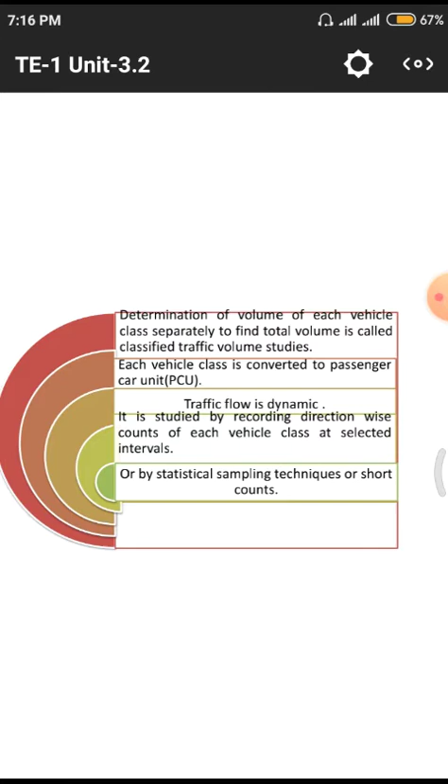These are the parameters used in traffic volume studies and their objectives. Different parameters are involved in these studies, meaning we have to control different points, such as controlling required at turnings, traffic lights, and signals.

Next, we have to give some amount of priority for different lanes through special design methods and facilities. Sometimes, for example, politicians and other politically responsible people have to move in a particular definite path, so there are no obstructions to their routes.

Likewise, we have highways of national importance, like high courts, supreme courts, and other structures with more political and social responsibility. For these places too, we have to give priority levels and control the traffic plan through different operational methods and pavement design based on the importance of the structures.

As I mentioned, high courts and other industrially important structures have more importance because a larger number of people move to those places according to their needs. So we have to give separate gradation to those ways, with a separate number of roads allotted to those particular places. This leads to the classification into manual counting methods and automatic traffic counting methods.

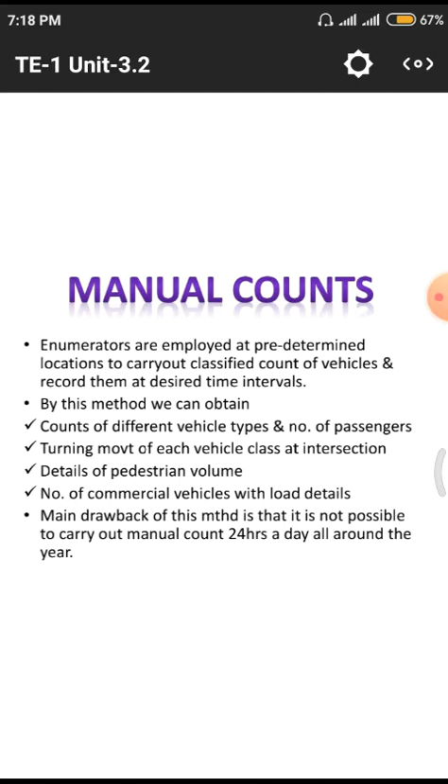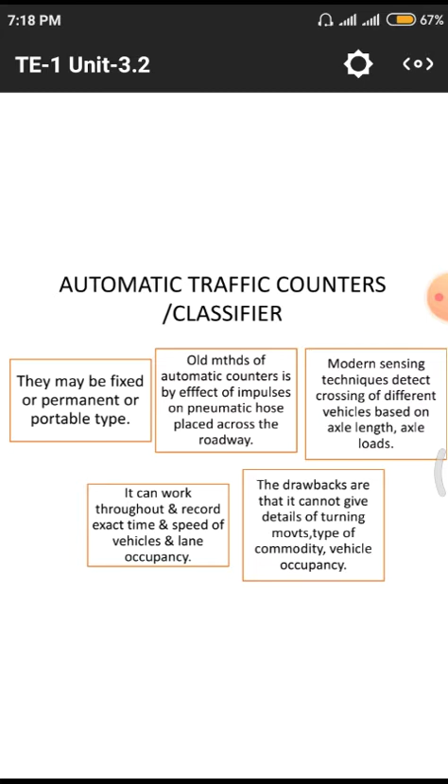Next are the automatic traffic counters - how they give data, and what is involved in these automatic traffic counters, whether it is robots, signal systems, or sensors. We have different kinds of traffic counts, each with its own purpose and output. We also need to consider if there is any interruption or any other special mechanism involved.

We also have an X cross section, where there is a huge amount of angle of deviation with respect to the road. But in the plus cross section, we only have 90 degrees and 180 degrees angles of inclination between the straight road and the crossing road, so it is called a plus road.

In that plus road, vehicles move in different directions - straight, left, or right. Every vehicle on every road has these three options, so they create conflict points where lines merge. In those areas, we have to use traffic lights and controlling systems in the form of police and other patrolling systems.

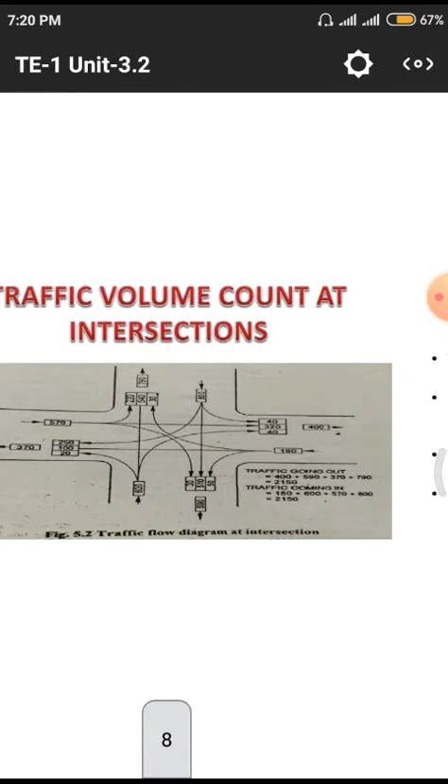Next is the presentation of traffic volume data. How do we obtain this traffic volume data on the basis of annual average daily traffic? That means we have to collect the total traffic data in a particular year, year to year, or for 5 years, depending upon the increment of the population in a city.

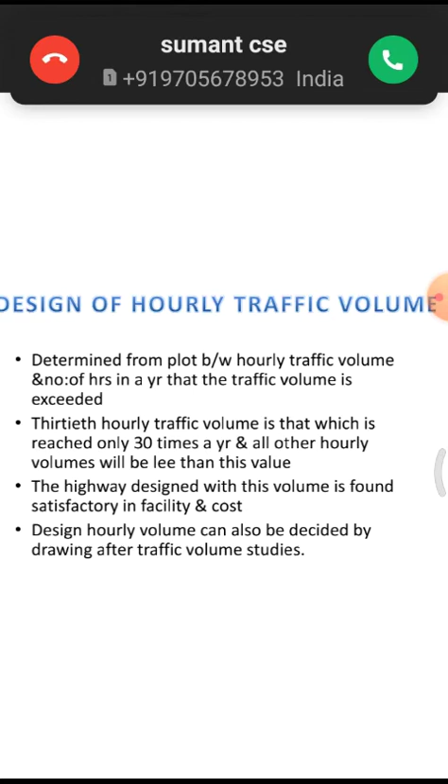So the highway is designed for whichever volume is found with a satisfactory facility and cost. That means 30th hourly traffic demands will give the maximum usage of the particular highway, so they definitely give which places we need to identify and which places we need to densify with roads.

Next one, the highway is designed for a particular volume and found to be satisfactory with respect to facility and cost. That means major content of the highways are designed for the purpose of moving carrier vehicles and other commodity vehicles, so that those highways will satisfy the needs of the vehicles traveling on them.

If there is a less span of the highway and a huge quantity of vehicles moving, automatically there may be a requirement in terms of densification or enlarging the roads, from one way to two way, or two way to multiple lanes, depending upon these hourly traffic demands in particular areas.

Next one, design hourly volume can be decided by drawing traffic volume studies. Why? Because here we are designing hourly volume, and that can be decided by using these traffic volume studies.

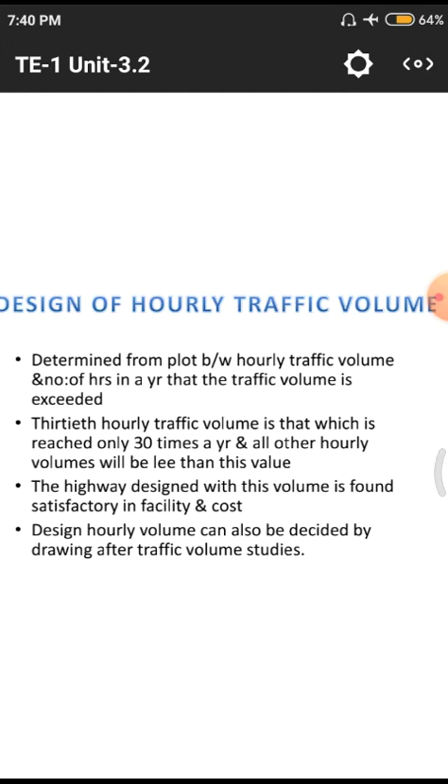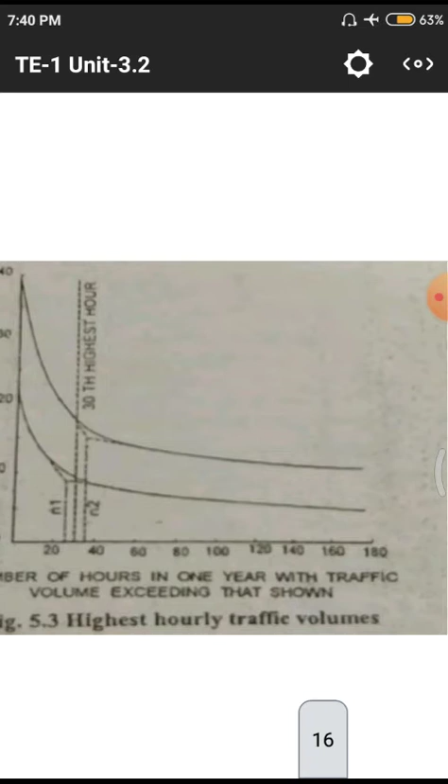This is the graphical representation. In the x-axis we are having the number of hours in a particular year shown - that means 20, 40, 60, likely up to 180. After that we are having the y-axis showing hourly traffic volume percentage - that means 0, 10, 20, 30, 40, and in those particular few periods there may be an increment.

After that we are having a decrement and a flat level. That means at the 0 level we are having 20, 40. After that we are having a decrement value - that means from 25 to 35 we are having the decrement value. So we need to take that point and enlarge the roads.

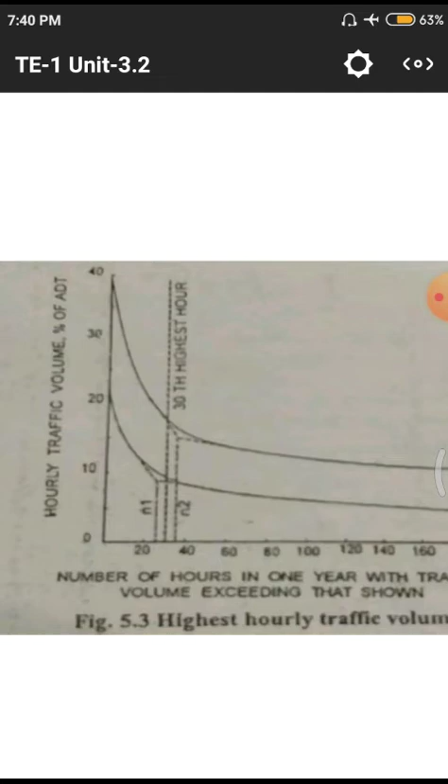How do we need to analyze this particular traffic volume data?

First, we have to use shortcuts and adjustment. That means what shortcuts we are having. If two roads are here, I will show with diagrams. If we start our journey from here and need to move, if there is any alternative, we need to simply connect these two, so that we save a huge amount of distance to the traveler. So we need these shortcuts, meaning different shortcuts to connect to different places.

First of all, we need to observe to save on traffic, commodity and vehicle clashes, and also to greenify the particular area by decreasing fossil fuel usage. Next, adjustments also come under these shortcuts.

Because of the requirement of a large number of enumerators and time and financial constraints during traffic volume count studies, shortcuts are adopted. That means depending upon the vehicular usage for a particular place, we have to find different shortcuts. The shortcuts totally depend upon the vehicular movement from point to point.

Previously I discussed drawing two points with a right angle triangle, so that the right angle triangle will give a solution. That means if we move in a diagonal pattern, automatically the total length of the journey will decrease. Likewise, we need to understand different routes and their shortcuts.

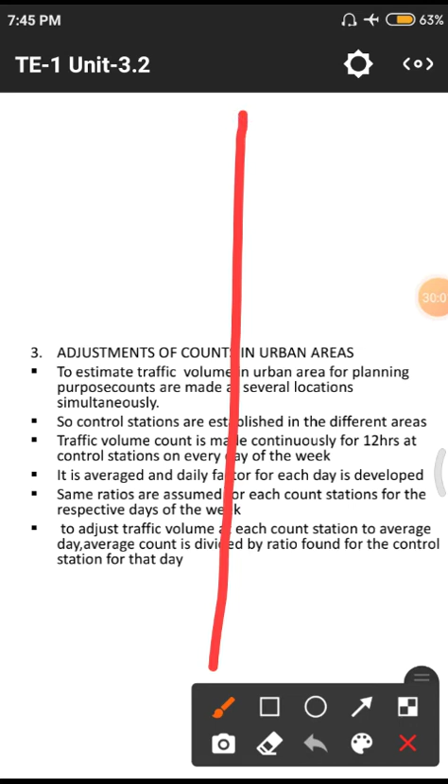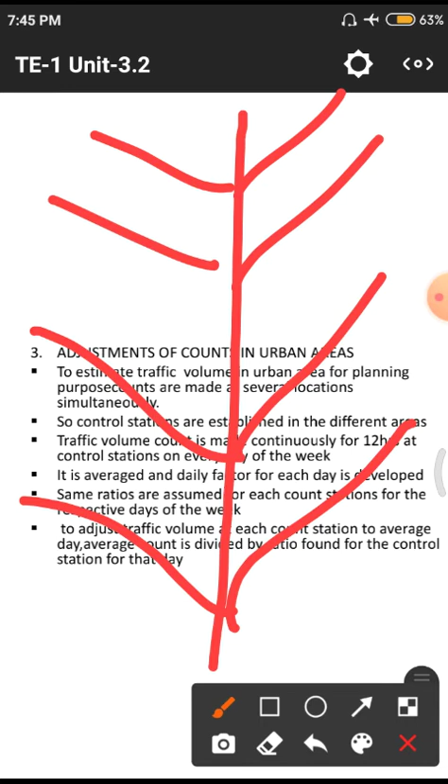I will draw a simple line. This is the major line of a particular road, so that if we are moving in different directions, it forms a leaf-like pattern, where all the rays connect to a particular midline. This makes it easy to connect different ways along a particular length, making movement easier.

Next, control stations are established in different areas. What are these control stations, and how do we utilize them? If there is a particular quantity of traffic jam in certain areas, we have to control the traffic by expanding roads with the help of bridges and other structures. Those are the control points, different control points, established in different areas.

Traffic volume count is also made continuously for 12 hours at control stations on every day of the week. This means traffic volume count is made using different patterns, normally man-made systems, meaning some amount of persons are employed to count the traffic data. If it is not possible, we have to automatically use signal systems and CCTV footage to count the particular traffic for a duration of 12 hours at different stations, for every day or particular week.

In a particular 12 hours we have huge amount of traffic. After that, so many people are going to sleep, so there is no traffic on different lanes. So we need to take a 12-hour traffic count only.

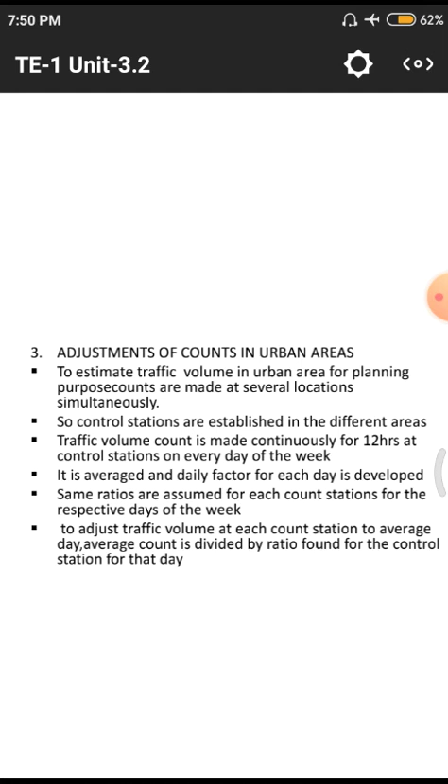For Vijayawada, what is the annual daily traffic? For the Prakasam district, what is the annual daily traffic they are having? So data from different states and other routes has to be taken, because in those particular spaces also we have traffic flow from our state to another state, or our place to another city. Likewise we need to take that data.

How do we adjust this traffic data? Using the daily factor. The daily factor means a 7-day average for 24 hours. We need to take the 24 hours of daily traffic, and that daily traffic will be converted into a 7-day average.

Next, the seasonal factor. In a year we have 12 months, and in those 12 months we have different seasons. So the seasonal factor is the 24-hour traffic volume for 12 months, meaning 12 months divided by 24-hour traffic gives the seasonal factor. Similarly, 7 days traffic divided by 24-hour traffic gives the daily factor. Likewise we have different traffic factors.

Annual daily traffic equals traffic volume count into day factor into seasonal factor. That means for a particular day, what is the factor - 1.5, 2, or 3 - and the seasonal factor also matters. In January we have the Sankranti festival, in December the Christmas festival, in March students have exams. Likewise we have different factors for different months, so we need to multiply the monthly factor, daily factor, and traffic volume count to get the average daily traffic demand, which is the major content.

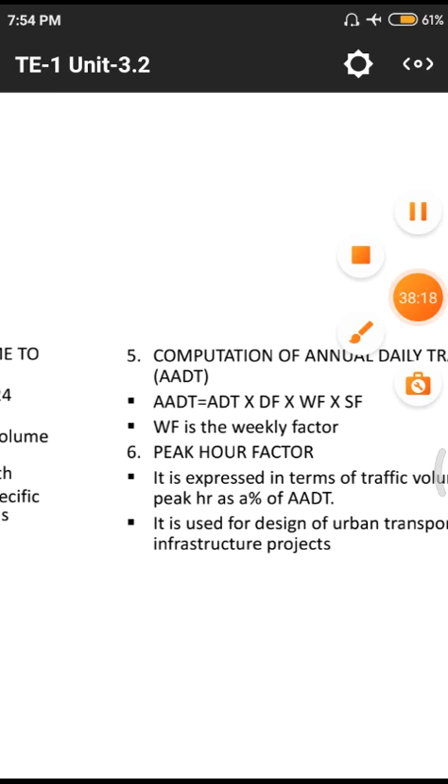All of those are responsible, because of these controls. Once again I will revise - these are the traffic volume flow.

In the traffic volume flow we have to categorize the count of vehicles. After that we need to use what are the dynamic factors, what are the static factors, and what are the major objectives of these traffic volume studies.

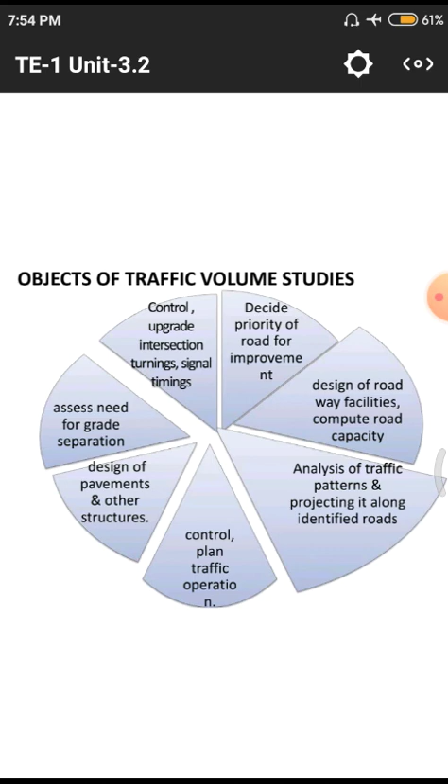First of all we need to control the traffic. After that we have to give priority to different lanes - that means different lanes we give priority according to their design purpose. This is the manual count plus automatic traffic count methods.

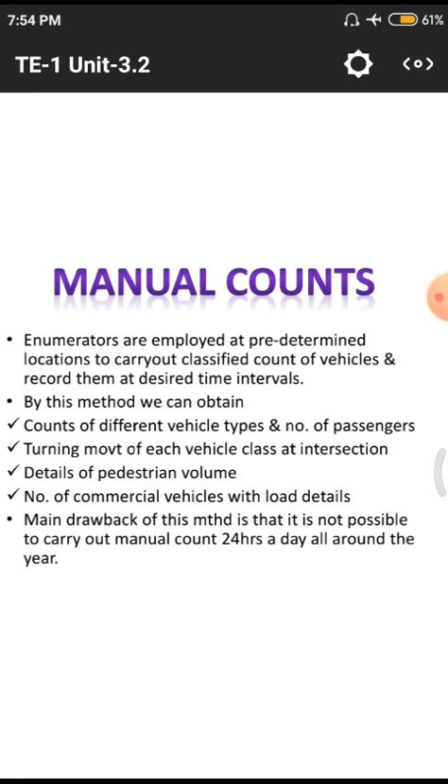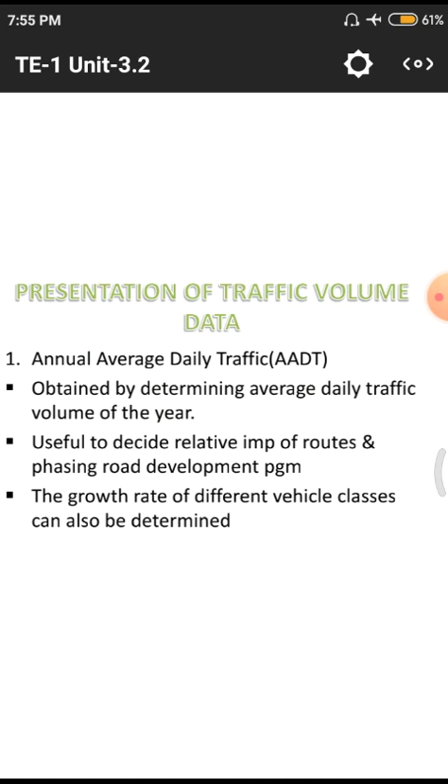Presentation of traffic volume data with respect to annual average daily traffic. To design this annual average daily traffic we have to use different parameters: weekly, daily, monthly, hourly. Weekly means for a span of 7 days, hourly means for a span of 1 hour, that is 60 minutes.

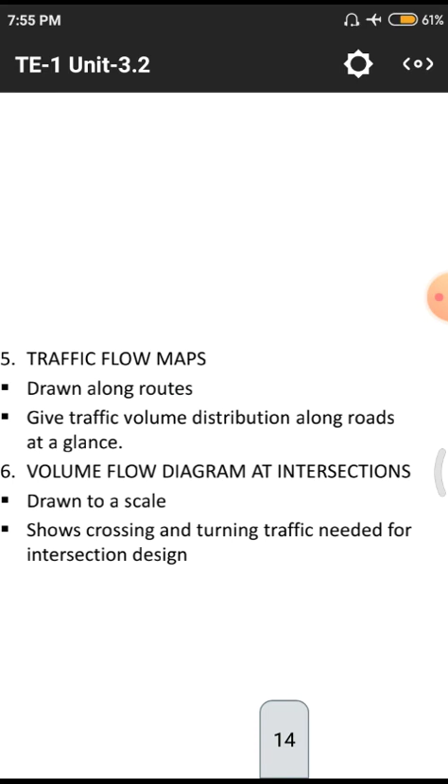Likely, different flow charts need to be designed. These flowcharts and volume diagrams are responsible for giving accurate and exact values. This is the design of hourly traffic volume, and this is the flow diagram.

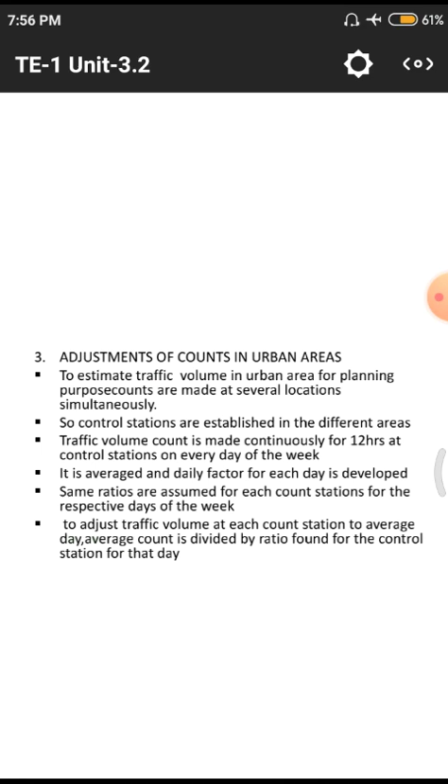How we have to calculate this data with respect to daily factor, weekly factor, and seasonal factor. By using those, how we calculate average daily traffic, and after that we calculate annual average daily traffic with respect to these factors - daily factor, weekly factor, seasonal factor, monthly factor, and the peak hour factor.

All those factors are responsible for the proper designing of a road without having any collapsing - that means avoiding traffic delays or mergings.